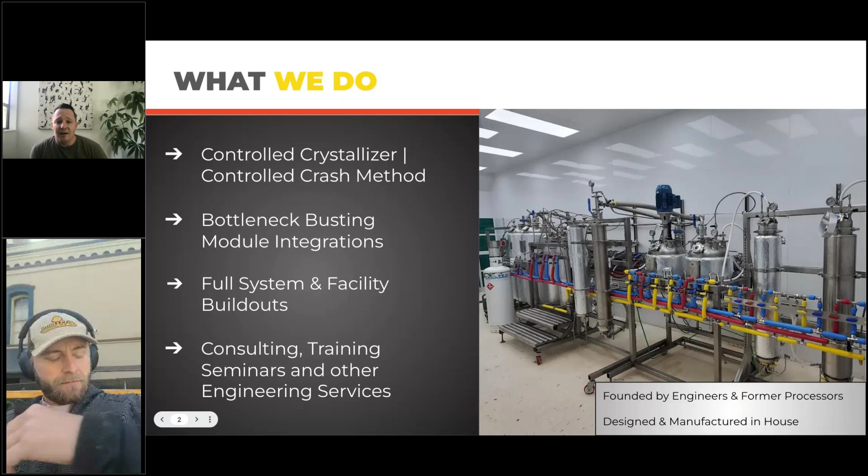And one of the ways that we do this is through our consulting and training and education. This is an example of some of the education that we really like to push. We feel like knowledge is power. And so this is just one example of things that we like to share with people in the industry and feel that it's a powerful tool to grow.

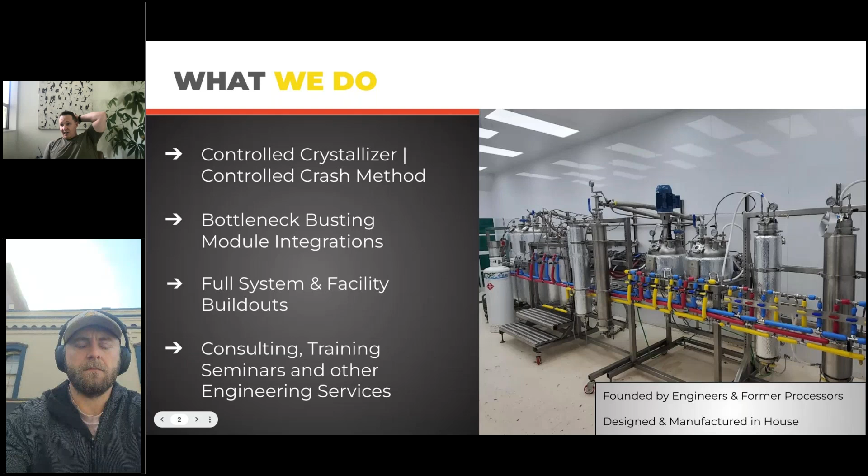Today's itinerary, we're going to go through some introductions here in a little bit. We're going to cover why do we crystallize. We're going to talk about some of the different crystallization methods, crashing versus growing crystals. And then we're going to talk about how do we crystallize and the different methods and scales, how you can systematically get in if you're just starting, and how you can scale that right into a

commercial or industrial scale. While we're at this, back in the question bar, if you guys could just type in, I'm very interested to see who's currently making THCA crystals and what scale are you growing crystals at? How much THCA you're producing in a week or a month? If you can add it in the question box, that would be very helpful to tailor this webinar to make sure we're talking to the right kind of scale, and we can go from there.

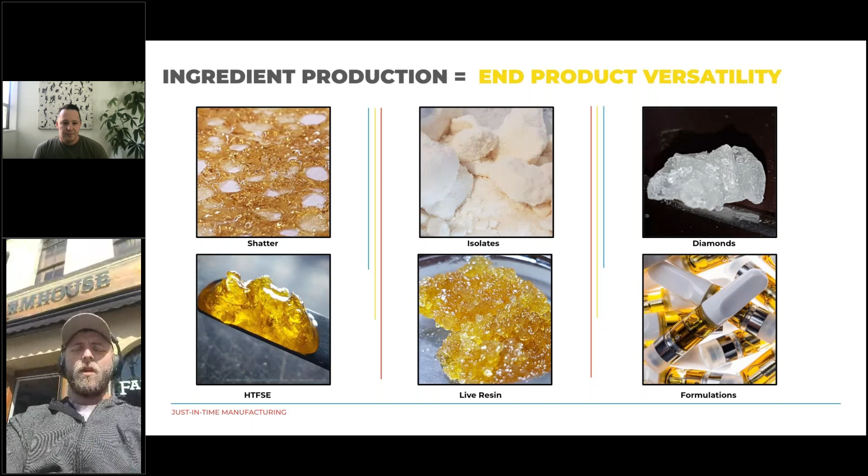Absolutely. So let's talk a little bit about crashing versus growing. Obviously, growing diamonds in jars or miners, you're growing usually larger crystals in a lot of cases, unless you're kind of fast crashing it in a jar. But one is kind of a slow, controlled growth, where the other is a fast, kind of forcing the precipitation of the crystals out of solution.

And between those two methods, you're going to have a different output. So a larger crystal, which may be a valuable product that you want to be able to make, is a bit limiting and a bit more of a novelty item in my mind, especially in a maturing market. But going for the crashing of crystals for an isolate gets that versatile type of product. Do you have anything to add there, Dustin?

No, I align with everything you're saying there, and I was actually reading through the questions. Should we answer some of these questions as we go, or should I just flag them? Sure. I actually had closed my question box, so apologies. I popped mine back up because I saw you going. No worries. So shout out to the lifetime GLG member. We got people that are making a few kilos a week. We got people that are doing hundreds of kilos a week. I'm gonna need this email list after and hit up some of these people doing the hundreds of kilos.

Where are you at? But one question that popped up was, have you seen decarb THCA clogging hardware more because of the difference? I'm assuming that he means vape cart hardware. The risk that you run with super high purity THCA that you melt down into D9 is that it may auto crystallize back out, and it is definitely a concern that you need to be aware of and prepare for to prevent from happening. So if you go D9, that's the preventative step, right? Don't put THCA in your vape carts. Convert it to D9 and put it in the vape carts, and then you won't have any crystallization issues.

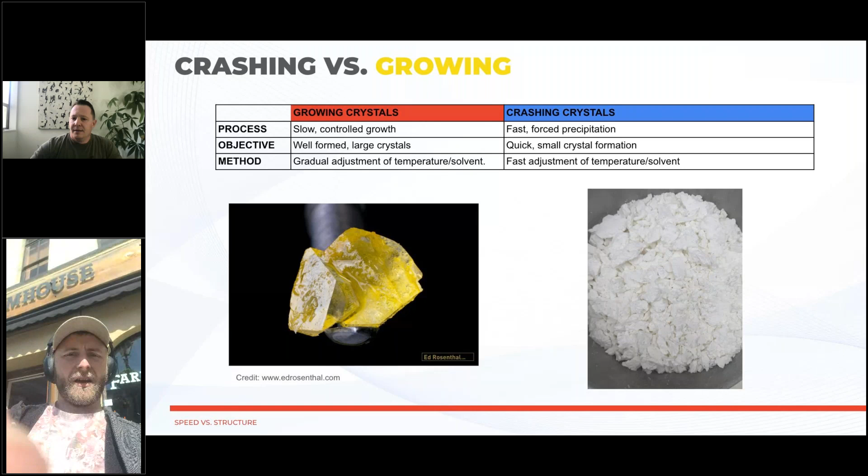Another question before we move on. Someone else said CRC is so expensive. Correct. Another question: what kind of percentage of THC are we seeing from the isolate? Mid 90s on a first crash, up to upper 90s, depending on how slow you go. And it's really simple to remelt, especially in a system like Evolve puts out there, to remelt it in place and do a secondary crystallization to get it up into those upper 90 percentages, no problem.

And it says best option for the decarb. Example: a stir plate, a vac oven with or without vac, nitrogen sweep, reactor. A lot of that depends on your scale. But doing it with an inert gas over the top is going to help with the oxidation risk that you might have. So I would suggest some sort of sweep gas on top, whether that's a hot plate or a reactor, something to keep oxygen out of the mix as much as possible.

Absolutely. And also potentially doing it as close to when you're, let's say, filling a vape cart or something. Keep it as isolate as long as you can for storage, and then decarb it as you need it to help avoid some of that oxidation and stuff like that. Right. It's extremely stable in its THCA isolate form.

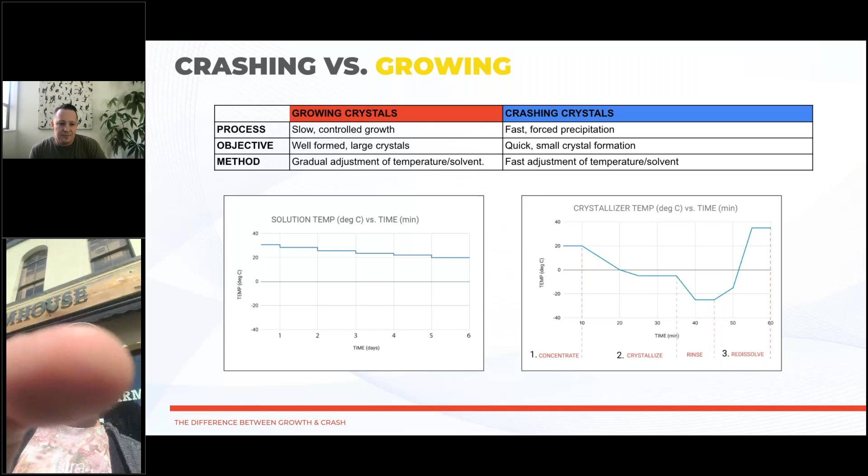Yeah, absolutely. Well, coming back to this, you want to go? Yeah, go back. Keep the questions coming. I'll grab Daniel's after we do our next little round of information here.

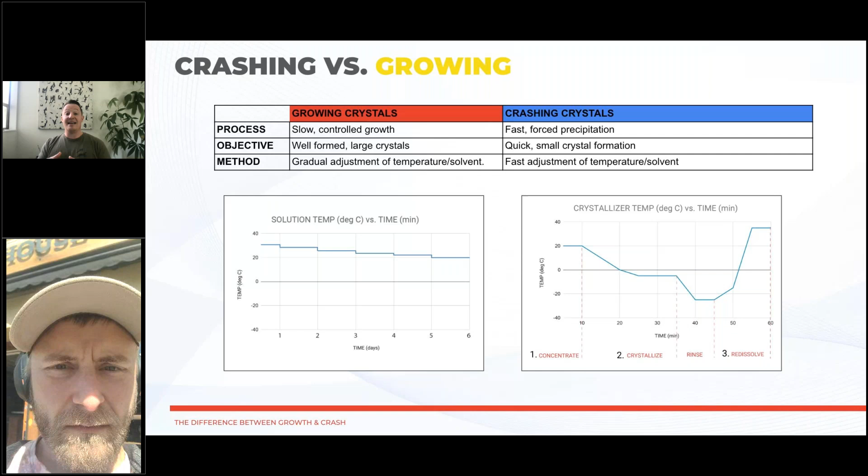Cool. This just shows temp over time, the difference between growing crystals and crashing crystals. Obviously, in growing crystals our time is in days, as opposed to crashing crystals, where our time is in minutes. So the idea is to quickly crash it and get finer crystals. Then, if we wanted to grow larger crystals, we can do that by removing all the things that inhibit crystallization and slow it down into the day time frame, or keep it as isolate, melt it down, and make all these different formulation products as you need them.

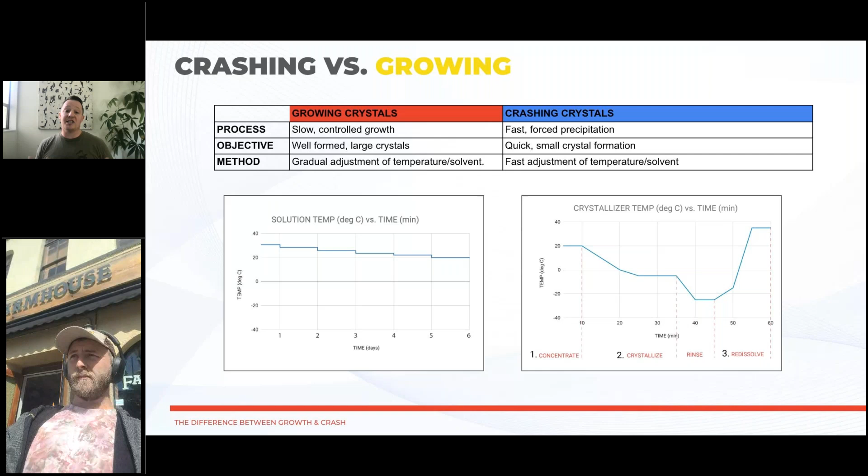And so there's definitely a correlation between both efficiency of the separation between these two things and time. So the balance becomes we want to do it quickly, but we also want to make sure we're pulling out as much of that THCA as possible so that our crystallization efficiency is high and we're not having a lot of it carry over into our HTE.

So the different scales, it sounds like some of you guys are doing hundreds of kilos. I don't know if it was a week, Dustin, that you saw, but there's a couple in there that were like hundreds a week. Fantastic. Yeah, those are big numbers. Obviously, you're not doing jar tech.

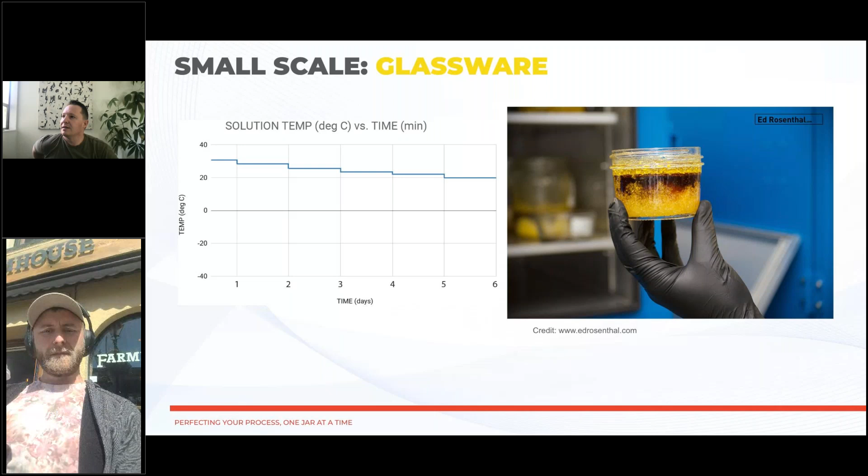A lot of it has to do with just kind of seeing the thing firsthand, and so it can help going through that process first to kind of get your head around it. Absolutely.

The next kind of scale is miners; that's generally the next leap up. Miners are generally thought of as making bigger crystals. You could also replicate what's happening in jars. Basically, a miner could be used as just a bigger jar if we wanted to fast crash. But generally, miners are thought of as growing larger crystals, and could be implemented after the larger scale, putting it into an actual controlled crystallization reactor, for example, and removing some of those things that inhibit crystallization to grow those bigger diamonds, those bigger stones faster. But yeah, diamond miners are generally the next progression past jars.

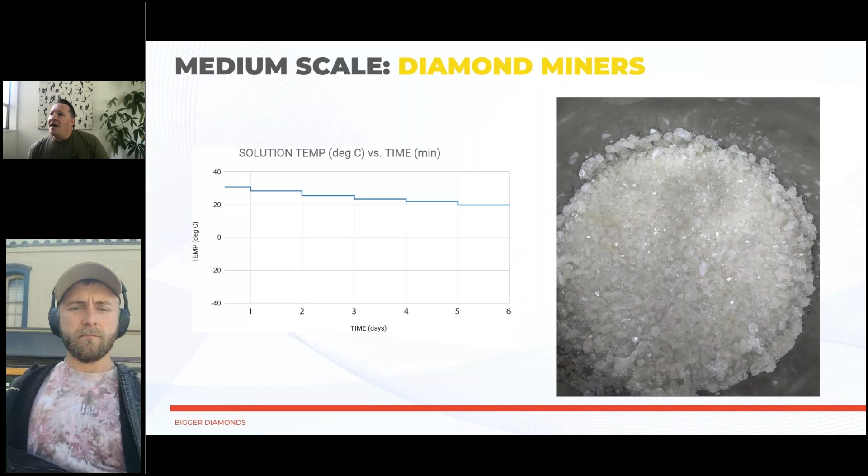And then into the commercial size or industrial scale of crystallization, pushing the limits and getting it into a reactor. This is an example. This is basically our controlled crystallization reactor. This is what we tie into the back end of hydrocarbon units. It can also be used on the backside of heptane extraction units as well, but generally for hydrocarbon. As you can see, the first vessel there with the mixer on it is where the crystallization is happening. That's where we're starting to grow those crystals in solution and have the crystals precipitate out. And then we've got our other vessel on the right-hand side that's going to be collecting our HTE.

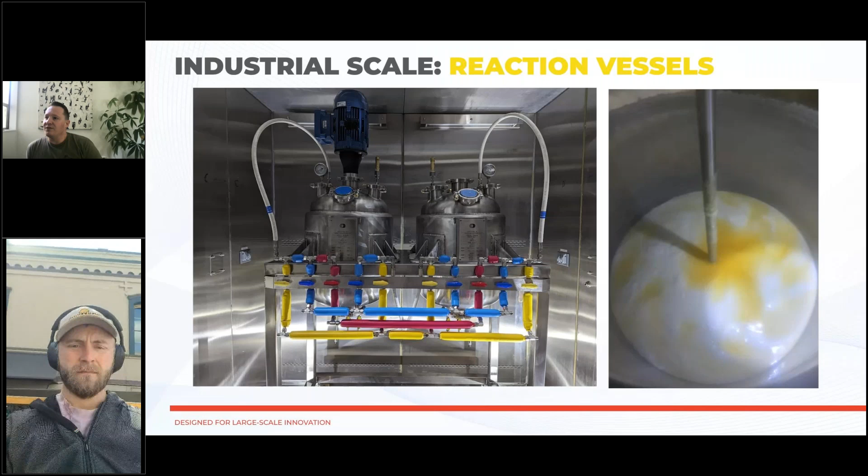There's a couple of different ways that we can look at doing this, but maybe what we'll do first is just show you what the process starts to look like as you see the crystals precipitating out of solution. You can see the lighter substance there is the THCA, and the darker substance is our HTE. And we call this the snow globe effect. So this is a very visual process still.

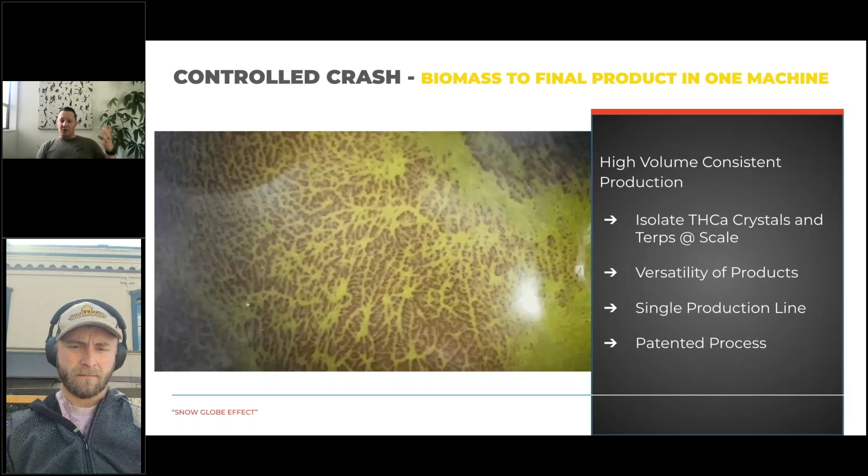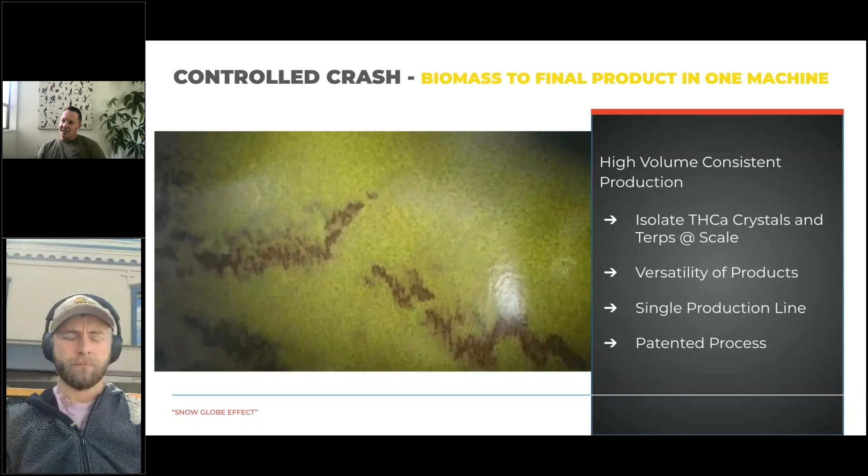Dustin mentioned, jars are nice because you can see what's happening. Even when we get into the reactor size, on our unit, for example, we've got big 3-inch sight glasses. It's still a very visual process, and we're trying to look for visual cues as to when the crystallization is ready to start that separation process. But this is kind of in the early stages here. And again, it's what we call the snow globe effect, or the crystals starting to pop out of solution.

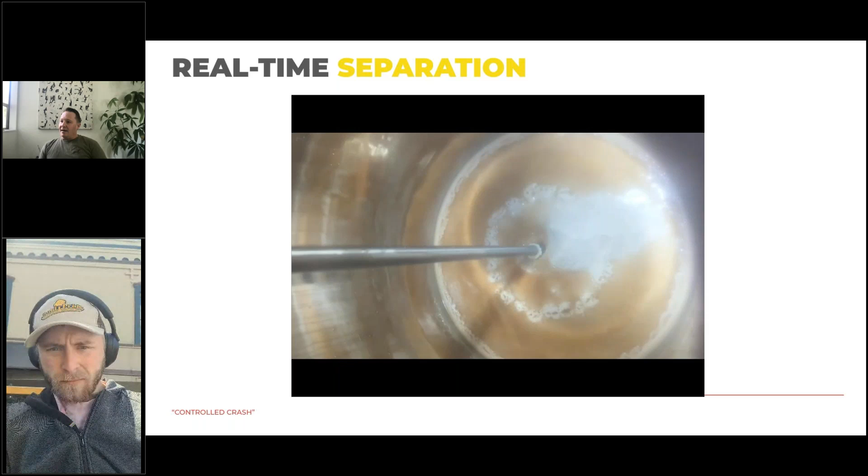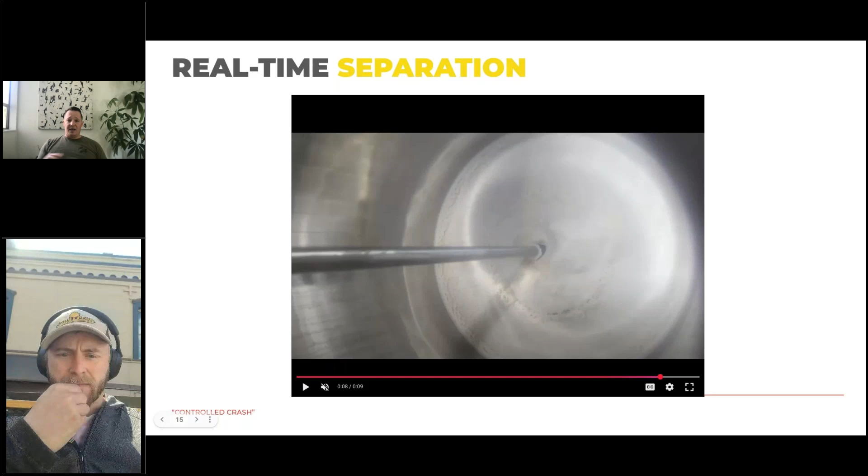This showcases how quickly the process can happen once you're scaled. And those guys making 100 kilos a week, you guys are doing this as well. As I mentioned earlier, this is in real time. I'll play that again. You can see that the isolate just sort of overtakes the entire vessel, and the HTE is being drained out and separated. I'll pause it there. At this first crash, as Dustin was talking about, we're probably in the low 90s percentage-wise of isolate in there, the potency.

And at this stage is where we would do a rinsing process. So we would now start to rinse this isolate with really cold butane. The reason we want it really cold at this stage is because we don't want to melt or dissolve any of these crystals that we just spent time creating. So we're really trying to rinse it and purify it, and that's going to get it up into the 99+% range to then be ejected. And there's a few different ways that we can eject that.

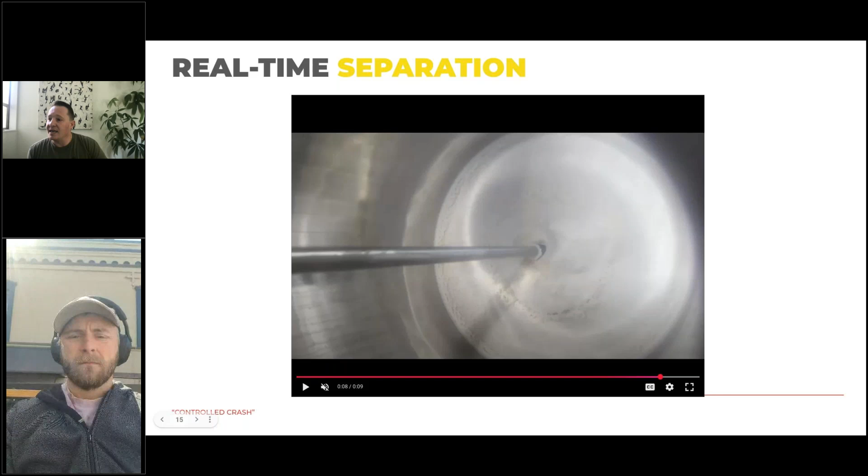And this speaks to the benefit of doing this in the reactor, which is in the C1D1 room. We can wash in place with more clean hydrocarbon. When you're doing this in a miner or a jar, that becomes much more difficult, much more involved, much less safe. Yeah. It also becomes harder to get a very efficient separation. With jars or other tech, a lot of times it's like 50%, 40%. Sometimes there's a lot of carryover in that HTE, not necessarily because it didn't crystallize, but because it's so fine or difficult to actually separate the HTE from the THCA. And so that's a very important aspect as well.

And why our system's called the controlled crystallization reactor is the control piece. You guys are probably familiar with fast crashing. You can take a jar, throw it in the freezer, just blast it with cold and fast crash it.

That works great. The problem with that is the faster you crash it, the finer and siltier the crystals are, meaning that it's more prone to clogs, and it's also harder to separate those two things and purify them. I like to think of it as, if we fast crash and we've got really fine crystals, it's kind of like a silt that we're trying to get mud clean off, as opposed to gravel.

And so we're controlling the crash so that we can grow these crystals to about 100 micron crystal size, so that we have a nice permeable bed, kind of like gravel, and we can easily rinse that gravel off and make sure that all the impurities are off, and the efficiency of that crystallization is really good as well. So yeah, I hope that answers Andrew's question of how do you remove the THCA after crystallizing.

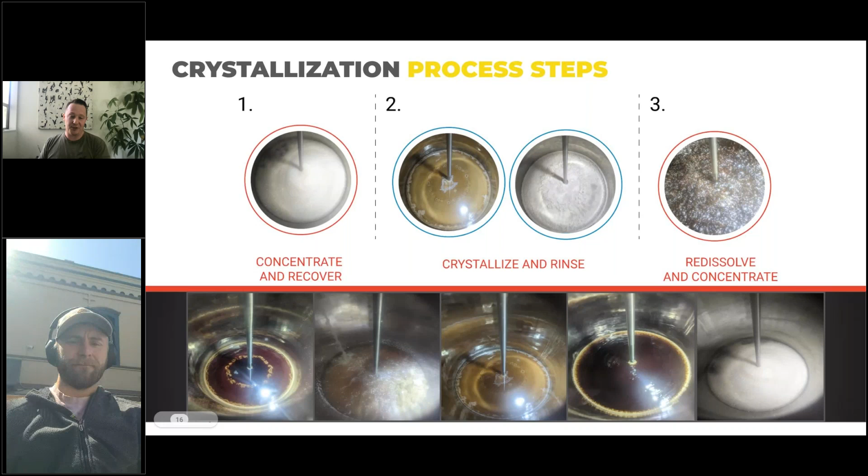Yeah, absolutely. And actually, there's some new tech that we've also got. Basically, we call it our THCA filter unit, and we've now found some of the biggest bottlenecks of this process are rinsing the crystals and making sure that we get a good separation, and then the ejection. How do we get access to those crystals? And so this filter unit, maybe I'll dive into that, kind of skip through some of this, but our filter unit is kind of a new thing.

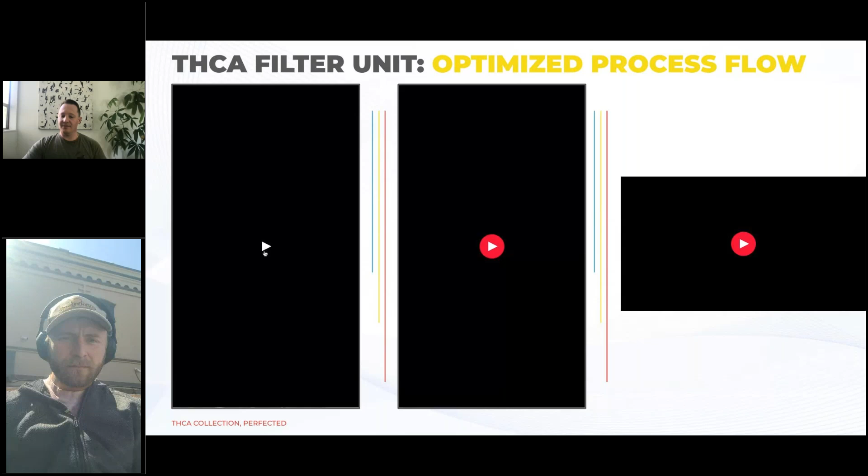I'll actually go back one and show you this. If you guys can see down here, hopefully this is big enough for your screen, but we would do the separation in our crystallization vessel, the vessel with the agitator. And so we're looking for those visual cues of, okay, the snow globe effect is happening. We're seeing that there's good crystal size and it's homogeneous in the crystallization vessel.

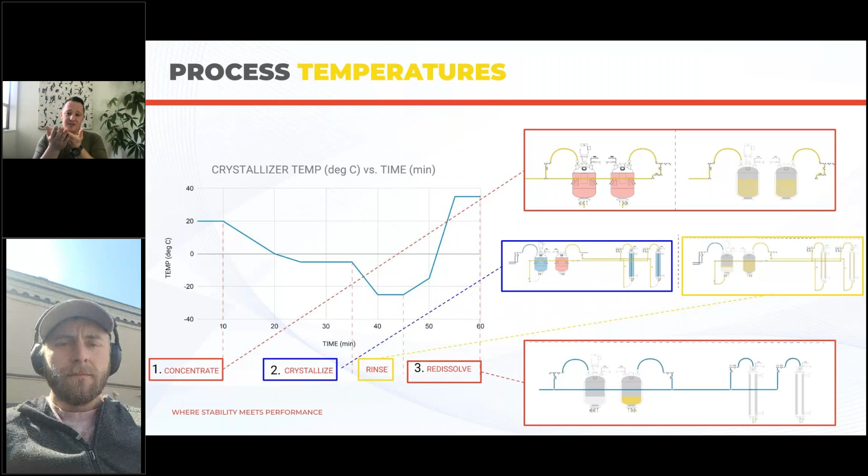And instead of doing the separation in that vessel, where we're filtering through a 6-inch filter plate at the bottom, we say, no, we're going to send that whole solution over to one of our filter units, which is basically a 6-inch column with a filter insert that's going to collect all of the crystals inside of that filter. It's going to allow for a much more effective rinse because it's not just having to rinse through a flat 6-inch plate. It's got a whole bunch of surface area that it can filter.

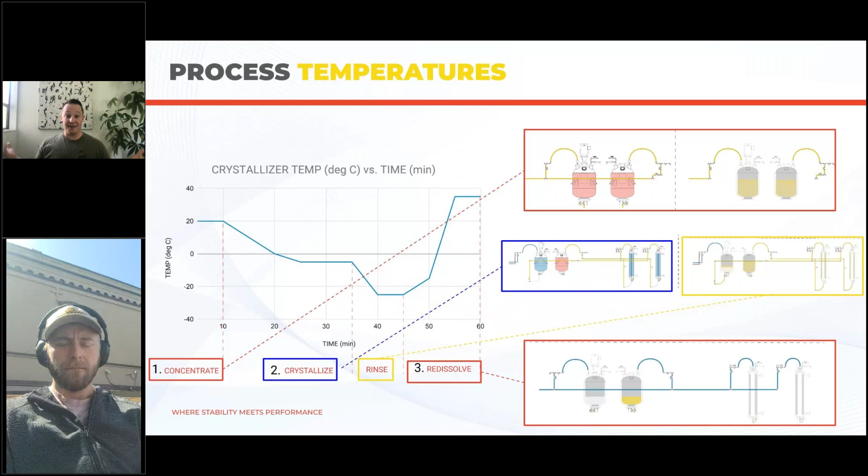Is that a sock? No, it's actually a stainless steel insert. A basket? Yeah, right. Reinforced. Yeah, and it sits right in the column. Sweet. And so you get a way better rinse effectiveness and it speeds that whole process up. But it also allows you, when it's time to get access to those crystals, you literally just pop the lid off and pull this filter out and dump it out.

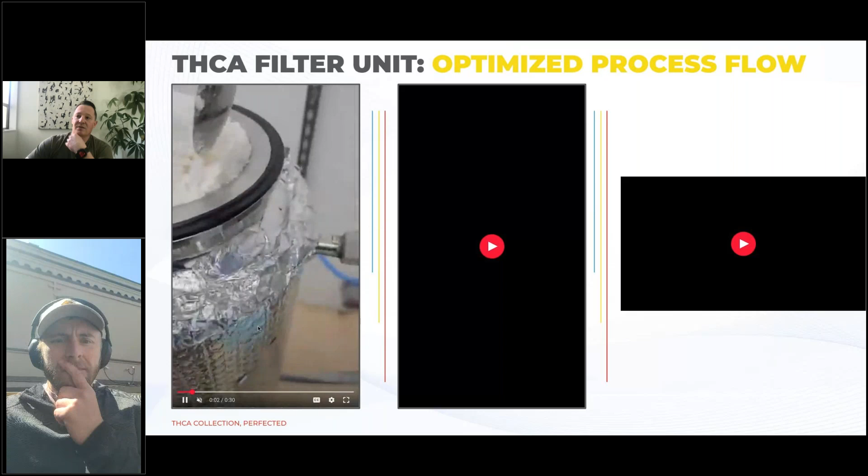And I've got it in a basket. It's in a basket. Yeah, I've got some video of what that looks like. So you can see here in this first video, we just pop the lid off, and there's the isolate all nice and washed, ready to be accessed. And then in this next video we're going to pull the basket out.

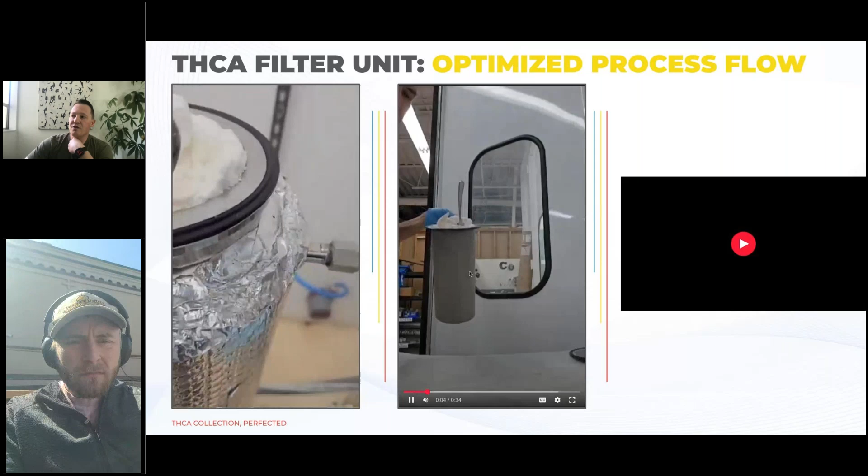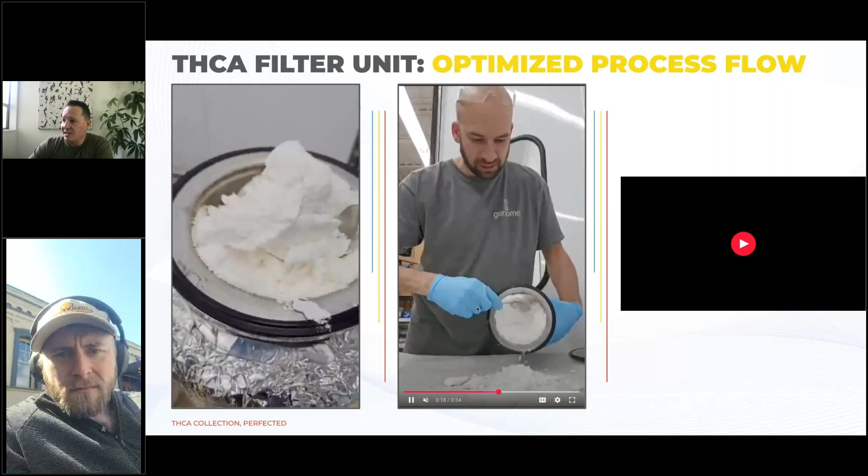This is actually an older version. I should probably update this, but the new version is like a reinforced stainless steel plate. It's really reinforced rather than this. We're getting rips with this. But you can see this is about 2.5 to 3 kilos of isolate that he's just going to be scooping out. It's fairly degassed and it's good powder size.

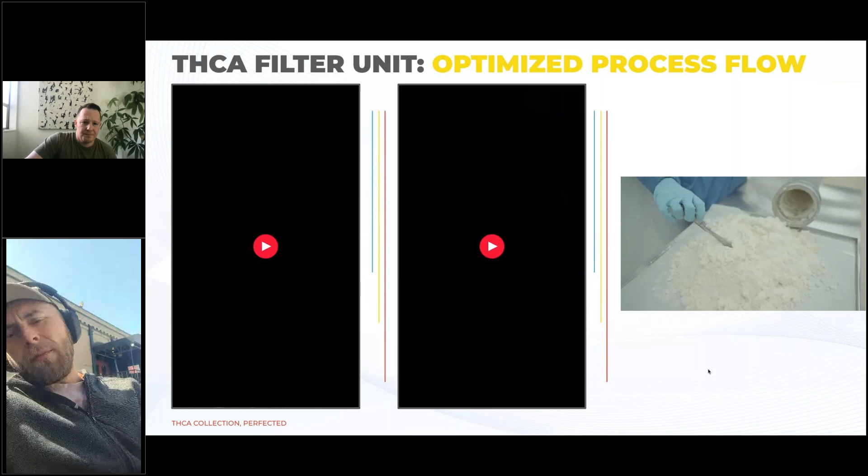So this would probably go into an oven for a couple minutes, just do a final degas, maybe more than a couple minutes. But basically, it's ready to go into storage. And then you can kind of see. What is Amon wiping out of there? Is that a secondary crystallization? It looks pretty pure. No, this is a first.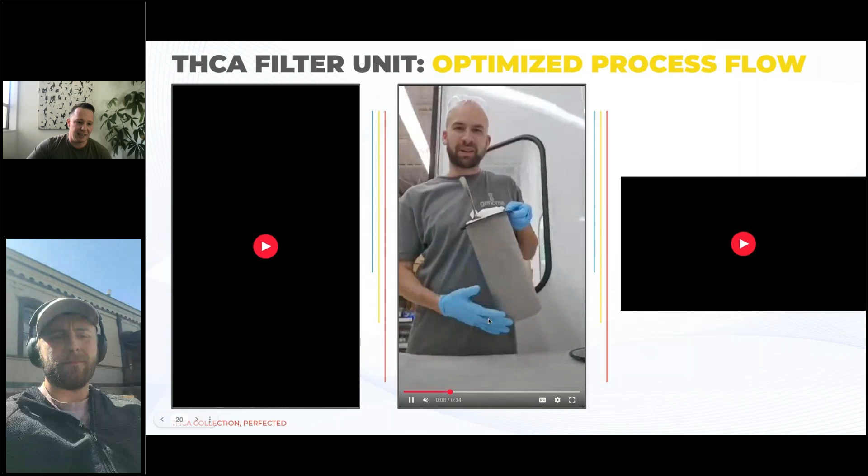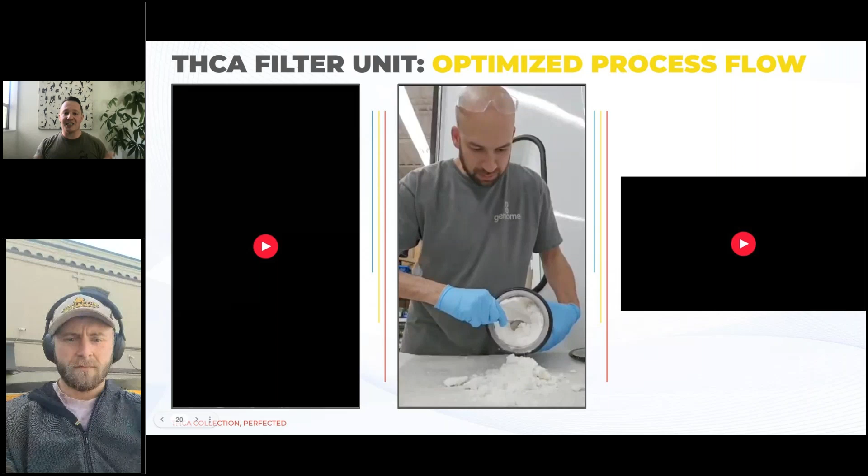So let's say that you needed to, sometimes what you can see is little pockets potentially in the middle, especially if the sock is too long. And so if you did need to do a rewash, you can very easily just send this back into the crystallizer and redo the process again. It's obviously going to be a lot quicker because there's much less HTE that you're trying to pull out, or impurities.

Would you do that in line, or would you just dump this back into the top of the reactor? You'd probably have to dump it in, or if you knew it before opening it up, you could just put it in and then shoot it with hot. Because if I got halfway through and I'm dumping it out and all of a sudden it starts turning yellow, I might stop, put that back in, and go from there. Dump it with hot butane, let the crystals melt back into solution, send it back to the crystallizer, and just quickly do it again. Absolutely. Yeah, sweet.

And then, that isolate, we kind of talked about growing larger crystals, but one of the things that I wanted to highlight is if larger crystals are a SKU that's popular for you guys or you want to be able to make, you can absolutely still do that. You would redissolve that isolate back into butane and put that into a miner. And because, as I mentioned before, we removed all the things that inhibit crystallization, terpenes, fats, waxes, the stuff that's in the HTE, this now crystallizes extremely quickly, and it doesn't need any temperature control. It doesn't really need anything.

As long as it's got a pressure relief valve on it, set to about 15 to 20 PSI, the evaporation of butane over time is going to change that solubility curve and really make those crystals pop and grow. And you're able to get a 0.5 gram to a 1 gram stone in as quickly as 12 to 36 hours, as opposed to weeks or potentially months to grow crystals that size.

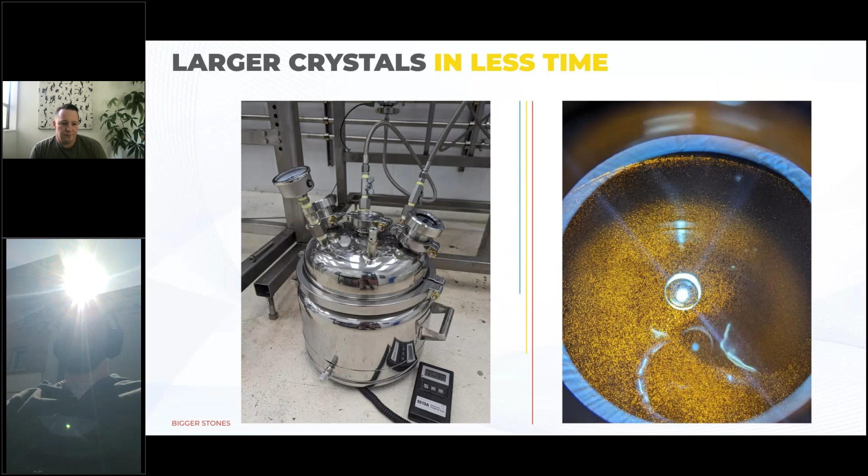Okay, we'll keep going. Evan asks, can you use super cold butane to eliminate having to use pentane, or is there some advantage to using pentane for cleanup? The real advantage to pentane is that it's liquid at room temperature. So if I don't have a big reactor or a miner, if all I'm doing is jars and I've got so many jars that I'm trying to make powdered isolate, I need to clean up with some liquid pentane.

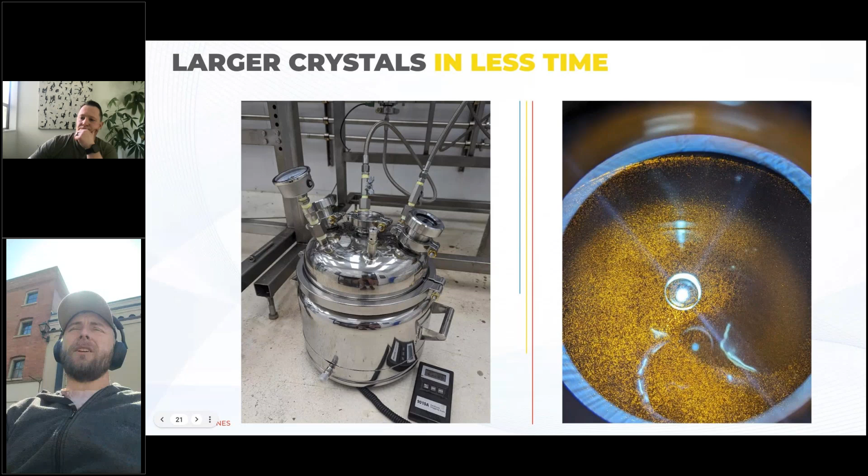If you're at that scale and find yourself in that spot, it's time to invest in a miner, because in a miner I can ideally run cold butane through again in a closed loop back into my extractor, my still. So that's the primary advantage, that it's liquid. The advantage of pentane is that I can do small scale trials to really lock in the tech, especially if I've never done any kind of crystallization before.

Even at the classes, sometimes we'll do a little pentane demonstration, but that's rudimentary crystallization, just trying to wrap our heads around it. You might as well just start with some sugar and water and make sugar crystals, right? So really, there is no real benefit to pentane in my mind

if you can use one of these gaseous hydrocarbons instead. Yeah, especially if you're using that for the extraction process upstream. So you get away from using different solvents for different things; it's one process in line using one solvent, and that's it. Keeping things simple. Yeah. How much D9 THCA could be in a solution without impeding nucleation and growth?

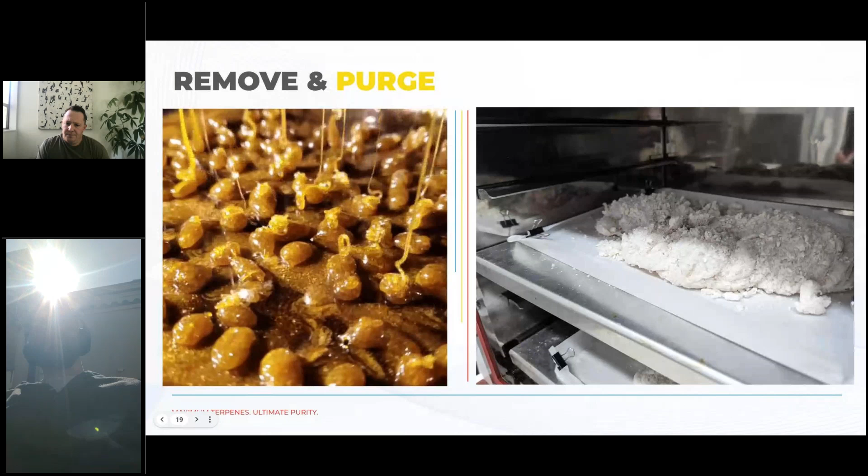I'm trying to think of what situation you mean. I guess maybe the question is, if you've got a bunch of really old material that's done some sort of decarb on its own, you don't typically see a bunch of D9 in the initial solution. And so maybe the time and place where this would happen is I'm trying to introduce a little bit of D9 into a heavy THCA to prevent it from crystallizing.

Like, for instance, when you're making liquid diamonds. Step one, you melt the stuff down. It hasn't started to decarb yet, but now it's liquid. And if anybody's done this and stopped right there, if you don't pour that out into a shatter, it just turns into a big giant rock of THCA in the jar, and you have to melt the stuff back out or chisel it out.

So then the theory, I know at least like 30% D9 typically will prevent that from crystallizing. Again, depends on purity. And I would be surprised if you could get it to crystallize at anything over 50% D9. And along that line, that might be a good way to help prevent oxidation, because if I've got, say, a vape cart that's 50% THCA, 50% D9 that doesn't crystallize, it might be less liable to oxidize because of all the THCA in there. But that's a very variable question. Somewhere between 20 and 60% is going to be enough, depending on what quality of THCA you had.

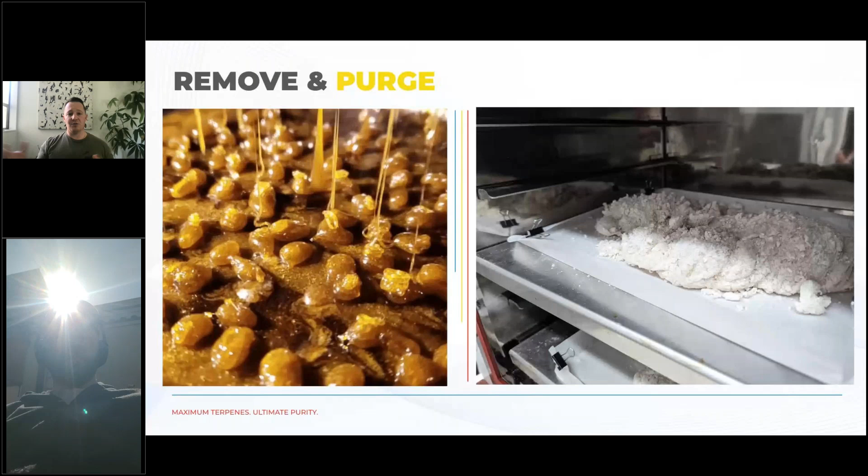Yeah. So I guess it depends on, do we have the filter unit or not? The reason why we created the filter unit was because a lot of the time was actually getting a nice rinse. The other thing is with the crystallizer, we're wanting to maximize how big the batches are. So we want to do 15 kilo batches as opposed to 3 kilo batches, because it's going to take about the same amount of time to do the crystallization process. It might be a little bit longer to do the rinse, but you're going to have much more isolate per the time it's going to take you.

One of the things that we talk a lot about is maximizing the size of the crystal batches. If your extraction can't keep up, maybe not doing a crystallization at the end of every shift, but building up our crude over multiple days and then doing one big crystallization on a certain day when we've built up enough crude. We've worked on projects where people are doing a crystallization at the end of the shift because their crude production is so high, all the way down to 4 days of extraction to build up enough crude to do a couple big crystallizations on Friday.

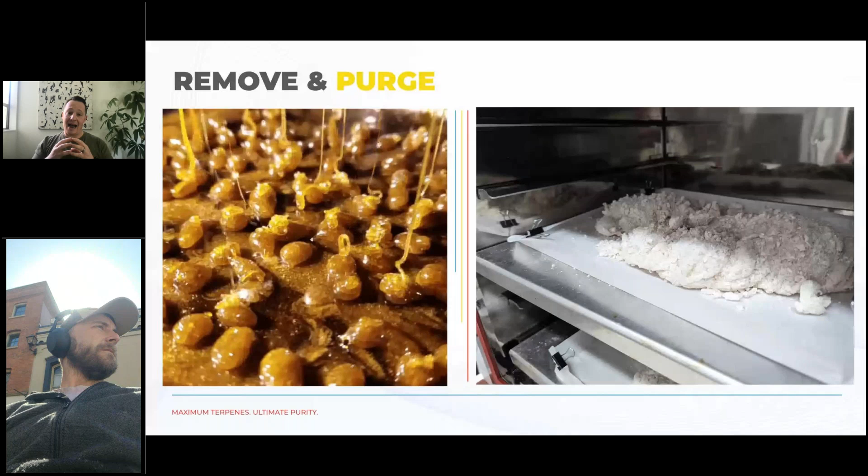Time-wise, you're looking at about 1 to 2 hours to get all the parameters dialed in and get a nice separation. Again, there's a definite correlation with how long we wait and how effective the separation is, so how much crystals we're actually going to be able to capture. And so there's a bit of a cost benefit analysis to be done there.

But having the filtration unit not only allows us a quicker way of ejecting the crystals, it also helps the rinsing process, which can take a long time if you've got a lot of stuff to rinse out. When you put it over to a filter unit, not only does that free up the crystallizer to do your next batch, but it's a much more effective way of rinsing off those impurities, because it has way more surface area to rinse properly, as opposed to rinsing through a massive brick of isolate through a tiny little 6-inch port at the bottom filter screen.

Yeah, absolutely. So that can be drastically increased, within a couple of hours. We've seen, if it's really greasy material with a lot of impurities, sometimes that can take 5, 6, 7 hours even for a big batch of isolate in a bigger vessel. But we can reduce that time by 25% or 75% by putting it over into the filter and really optimizing that.

Yeah. Wes has a question. Can you take two ingredients and mix them back together to make a batter or butter-like product?

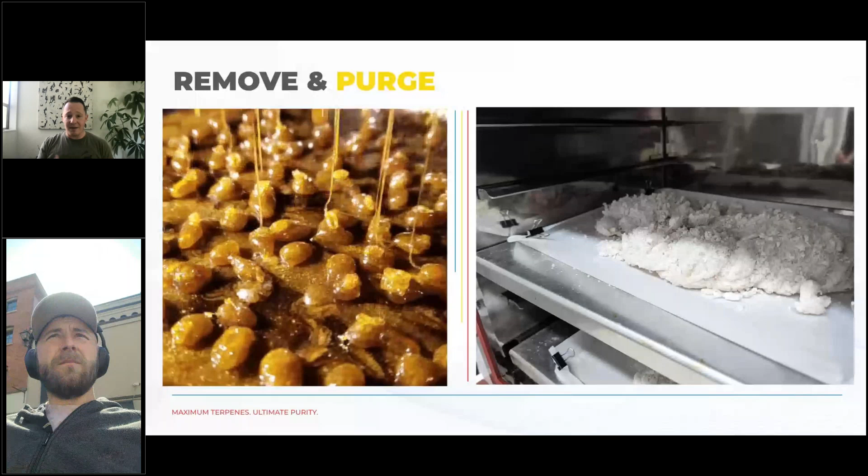And hey, I wish this had a bit more of these kind of terps in it, or I wish it was a bit more battery. You can do all those things a lot more seamlessly by thinking of these as ingredients and making your product as opposed to hoping for the best as you pour it out of the collection pot. Absolutely. Another person: my crude tested at 20% D9 because of the extraction method, CO2. Just stop right there, that's where all your problems are, because of your CO2. Whatever it takes to get away from that.

Yeah, and Daniel, I can answer that as well. If you want to reach out, we've got some calculators that might be able to help dial in some metrics and get at least a range.

Can you elaborate more on how you'd make shatter from THCA powder and HTE? Is it heated after it's mixed to melt everything down? Yeah. So first thing I do is melt the THCA, heated up until it just starts to melt. And then I'm going to real quickly whip in my terps, and I'm going to pour it out on a sheet. I'd say parchment paper, but there's issues there with the plastic in the parchment paper. So take that at your own risk, figure out what you're going to pour it out on.

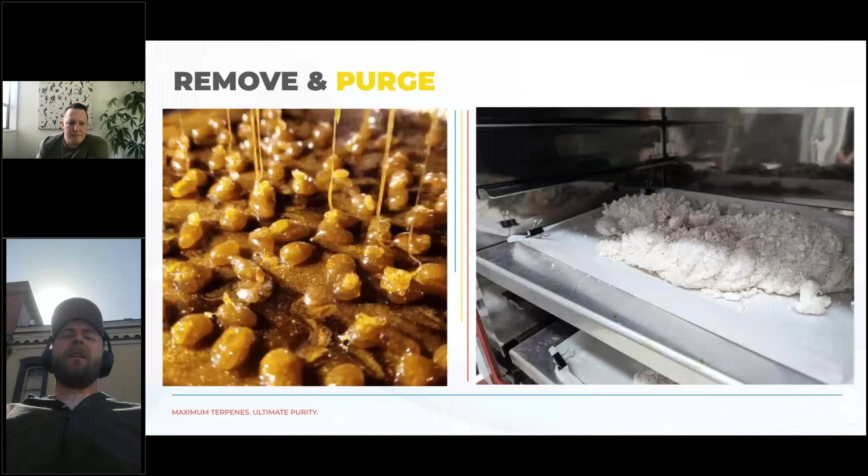I've seen guys shake it at the right time, and safety with all of this. Like, this is what I've seen people do. It's not necessarily what I recommend, but shaking the jar at the right time can help prevent a hard puck from forming in the jar. But keep in mind that you're shaking a glass jar full of hydrocarbons, and take that at your own risk. Maybe don't put it real close to your face while you do it. Do it as far away from your face as possible.

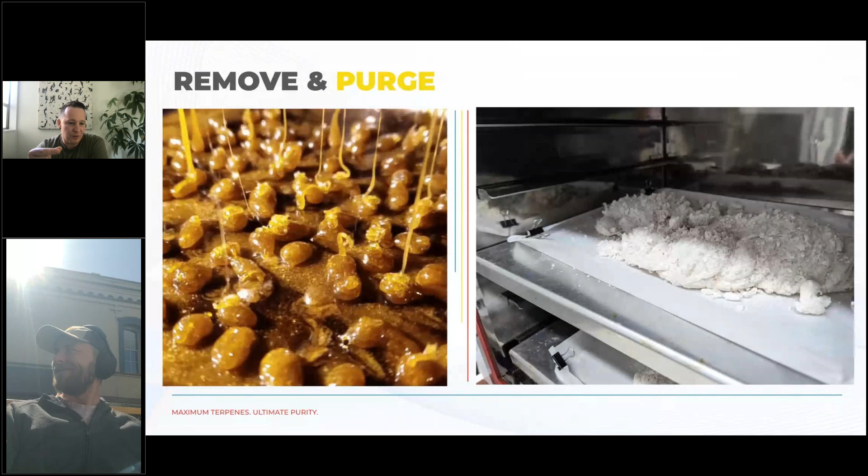Those silicone jar caps that have the little burping nipple on them that Murphy had? Would those work really well? Yeah, I mean, if you can control the burp, that'd be great. But even if you don't have that, you just got a regular lid.

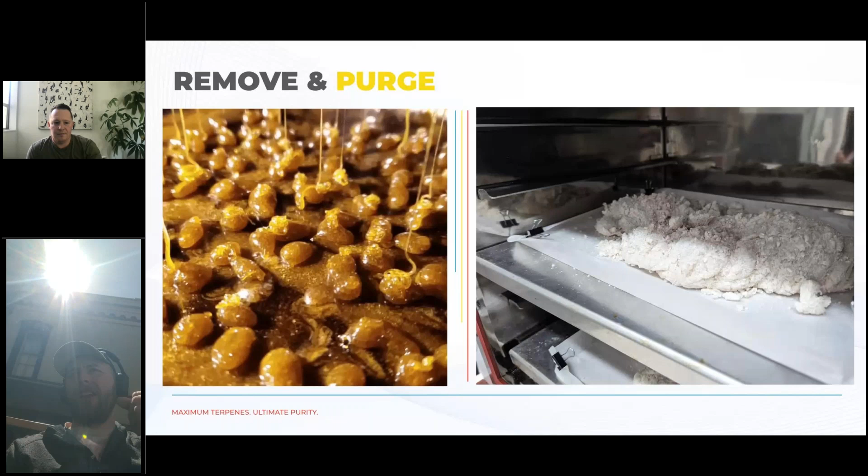All you have to do is crack the ring slightly, because that now allows the lid to come up off the jar without it opening and exploding out or whatever. So just a slight crack, and you'll see it because it'll start bubbling immediately because the head pressure's changing. That's usually enough to keep the puck from forming.

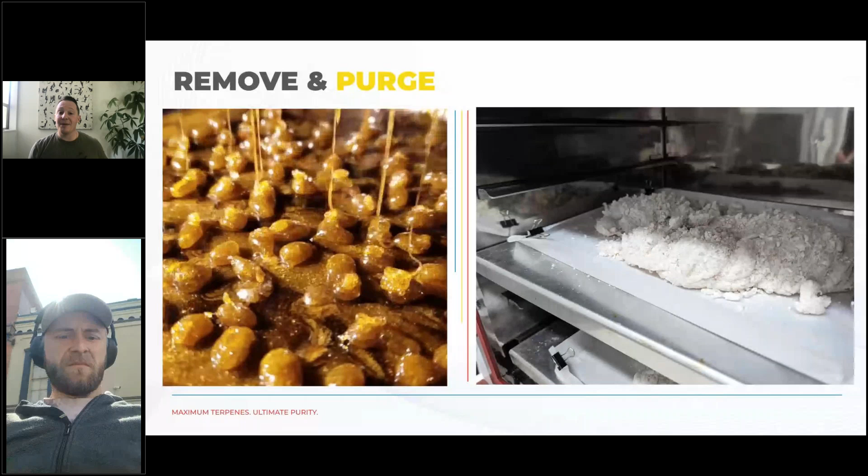I guess the last question. Go ahead. I was just going to say, I'm answering some of these people directly.

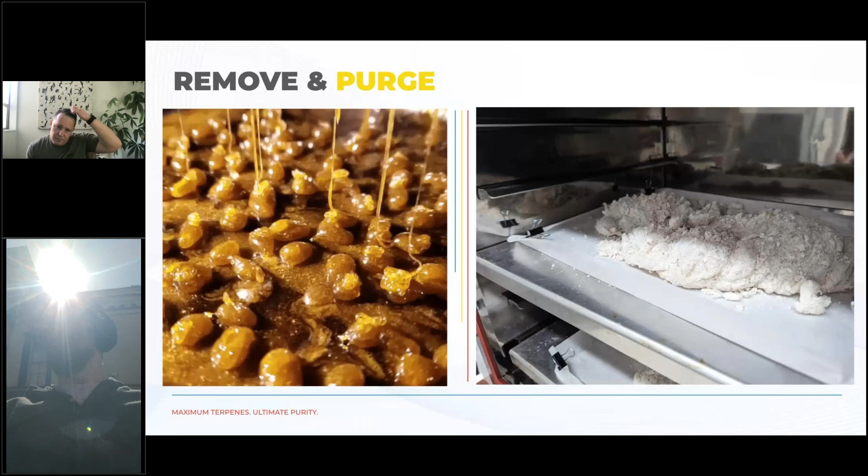One of them: how should THCA be stored? Is moisture absorption bad? If it's a really, really fine powder, then it could clump a little bit if it gets moist. Keep in mind that THCA is hydrophobic, so water is not a huge issue with it. Keep it in a cool, dark place. A lot of people just put it in turkey bags that they tie and put it in a bucket. And I've worked with hundreds of kilos of THCA like that, and never once have I seen a desiccant pack or really water be an issue at all.

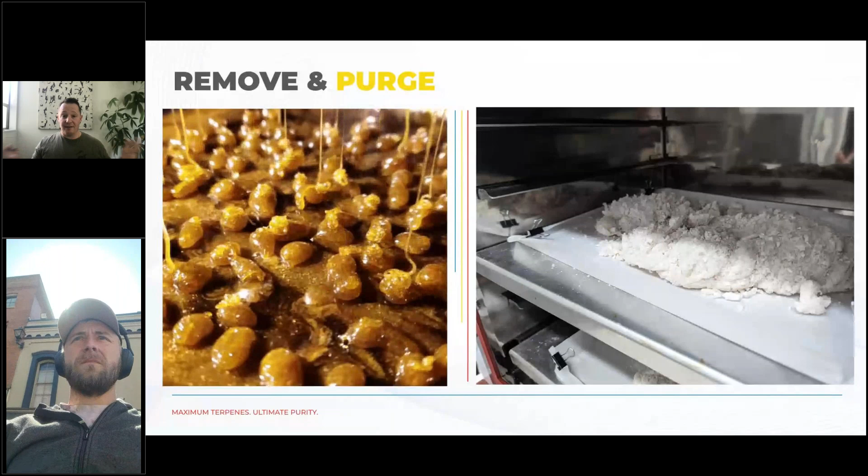Yeah, that's one of the advantages, the shelf life of it. So if you're not going to use it, as you mentioned before, instead of making too many vape carts or shatter or something, wait till you got the order, fulfill the order. We're talking about just-in-time manufacturing as opposed to, shit, let's just make 50,000 carts and hope they sell. Let's maybe do 10,000 at a time instead, and roll them out that way.

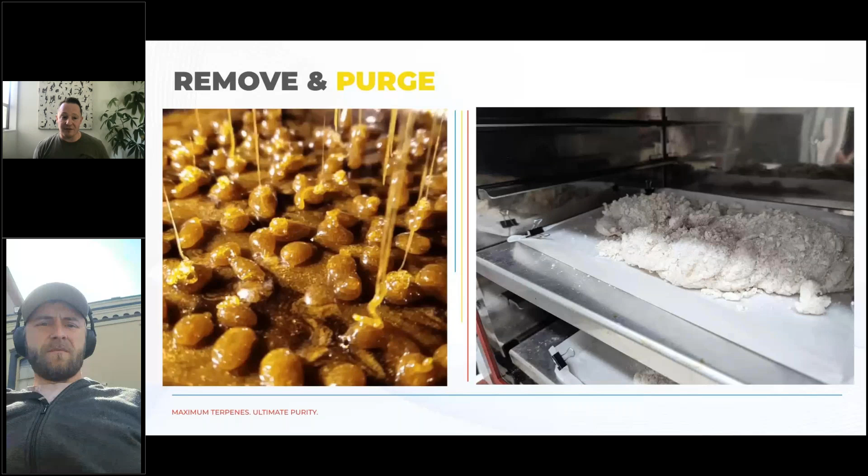And then maybe there's a shift in demand. Maybe we don't need this, or we want a new flavor, or we want to divert that to a different SKU. It just gives you ultimate versatility and agility in an ever-changing market demand. So yeah.

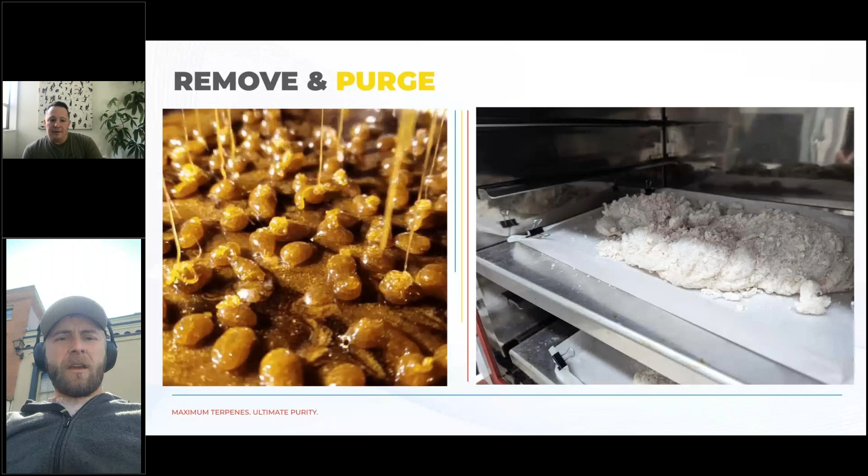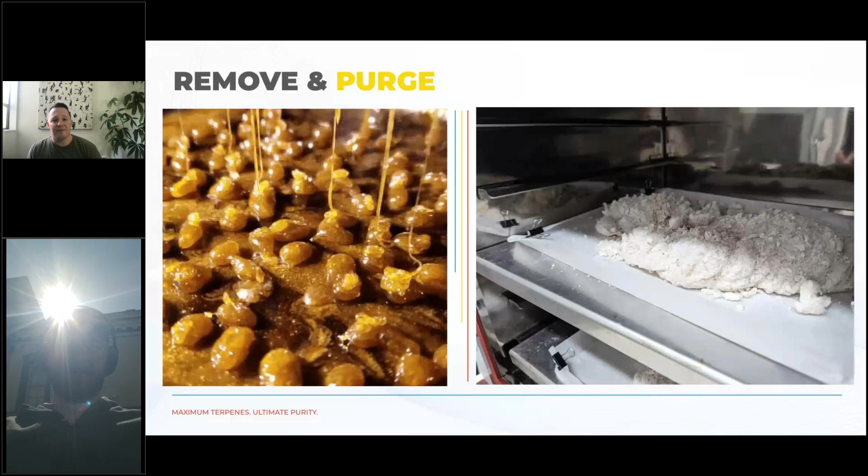How big is the crystallizer? It's 65 liters, but 50 working liters is the standard one. We also have a smaller one, an 8-inch version. I don't know the volume of that, but if you're interested, just put a question in this chat, and I can get you a volume for the 8-inch version. But yeah, 50 working liter volumes on the standard crystallizer.

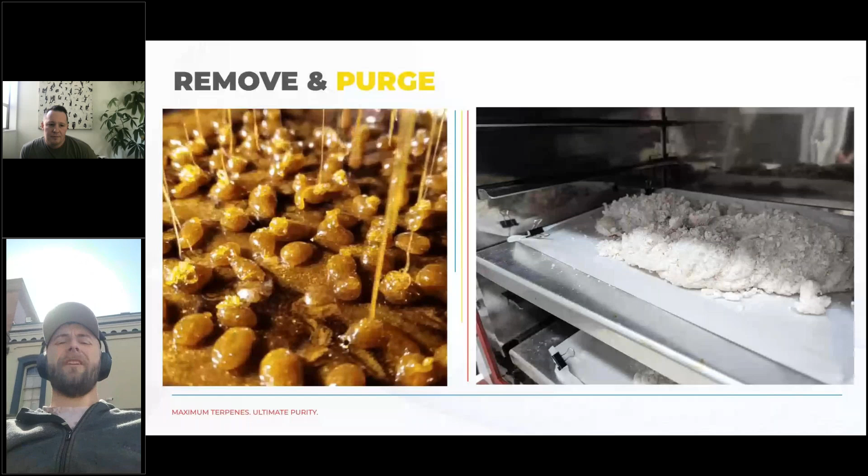Yeah, for sure. Andrew, don't put THCA in your vape carts, and then you won't have THCA clogging your vape carts. It's an easy solution to your problem. Absolutely.

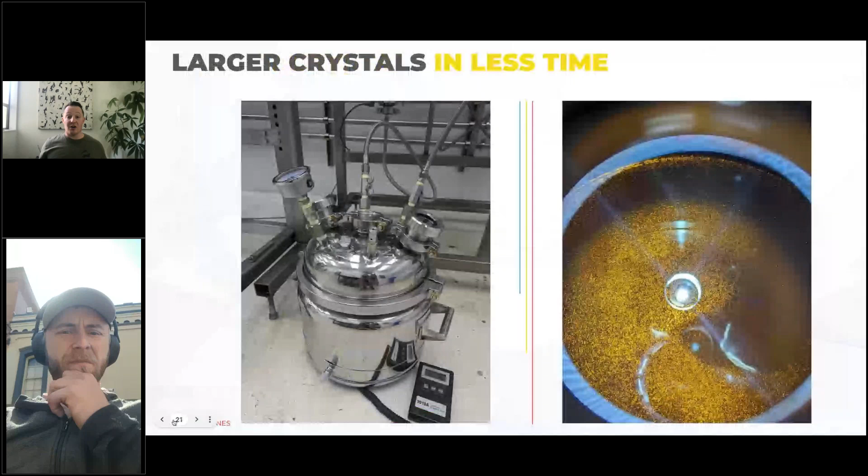I think we've pretty much hit all the questions. The last thing I have for you guys is this is one example of education that we do, webinars. It's an easy one for everyone to jump onto a quick call. But in the past we have also hosted in-person seminars at our demo facility. This is a great opportunity to not only network with like-minded individuals, but also get your hands on the equipment, see how it works. We actually run real biomass in these seminars.